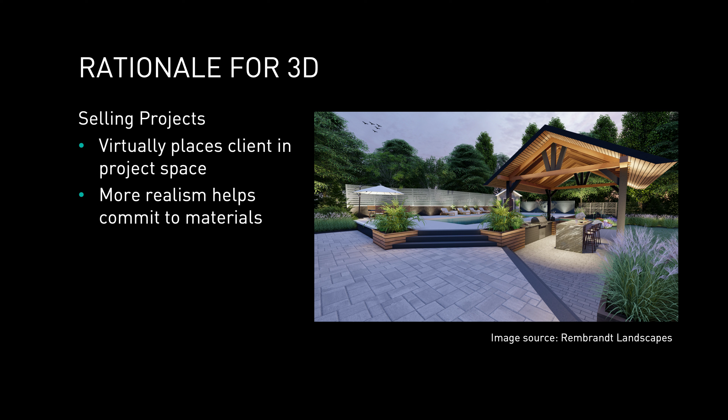So quickly considering the rationale for 3D, and why not all 3D modeling is the same. We may all have seen pieces starting in 2D and finished in a real-time rendering solution like Lumion, Enscape, Twinmotion, and D5. This 3D representation is very telling visually, and it does help sell your vision for a site. In this example, with the video animation of people walking as you move through the landscape, it can also give you a great understanding of what the project will look like.

But the challenge we sometimes see with this virtual representation of the 3D model is that you don't necessarily get data out of it. So there's a need to keep what you understand about objects that are generating data, and try to figure out a way to get a little bit of both — the selling standpoint from a virtual representation, but still be able to capture that data. So we still see the need for plans and sections and being able to calculate from objects and those dimensional shapes. This information is still attainable, but we want to recognize that we might not necessarily see this from those more surreal or post-rendering solutions like we just looked at.

One of the things we understand with 3D is that 3D geometry can tell its own story. When we think about area, perimeter, height, and depth, those are pretty standard understandings of what geometry can tell. But what about surface area? What about volume? What about the distance along an edge or the distance from one edge to another? Maybe even that depth and height relationship, that width and thickness relationship, the weight something might potentially carry, the angle or slope that goes along with the surface area, being able to perceive that angle or slope or gradient, and ultimately things like perimeter.

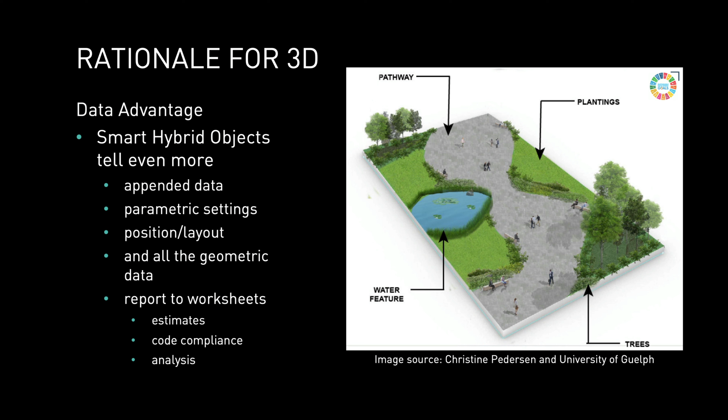So we're going to start into the presentation where we left off with the learning objectives. We're going to go directly into the terrain model. If you have ever heard or never heard of terrain model, one of the things we can all understand is that most sites have a ground surface, and most sites have a changing terrain in their ground surface. So this idea of understanding how we can virtually represent that terrain or surface treatment could be very useful for us in analyzing our landscape.

So a digital terrain model, or DTM as we call it in the industry, is a replication of a site surface. In most cases, you'd recognize it as a triangulated irregular network, or TIN, or it could be a raster or grid network. So you have this ability to see a surface represented in some form of tessellation that stays edge to edge or surface to surface, showing how things relate in that connection of surfaces, and allows you to see what that looks like in the overall context.

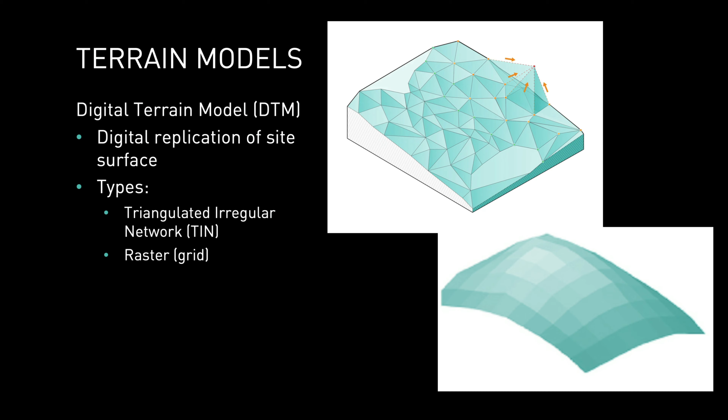So how do we get this information into a terrain model network or some other kind of surface? In most cases, you could get a 3D surface from surveying and mapping techniques, like drones capturing a LiDAR surface, or photogrammetry, where the pixels are smart enough to know their geographic or surface position. You could also get this information from 3D points captured from a GPS device, a total station, or an altimeter, gathering elevation data from the site. And if you're making use of 3D polygons provided by someone or some agency, maybe through GIS or from a survey engineer, all of that source data can be helpful to inform your terrain model.

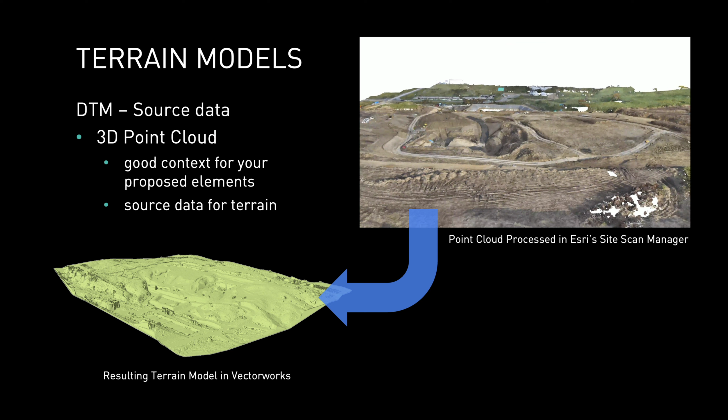Here's an example of how a 3D point cloud could be enabled. Being able to do some sort of scan generates a 3D point cloud, and those 3D points can then be used to create a terrain model. Through an example of Esri Site Scan Manager, you get the site scan and a software application that helps manage those points, and then you bring that information into your software to create that tessellated or triangulated network of surfacing. So those 3D points go to work to create that triangulation of the surface, and in any sense, this is a really good source for terrain creation.

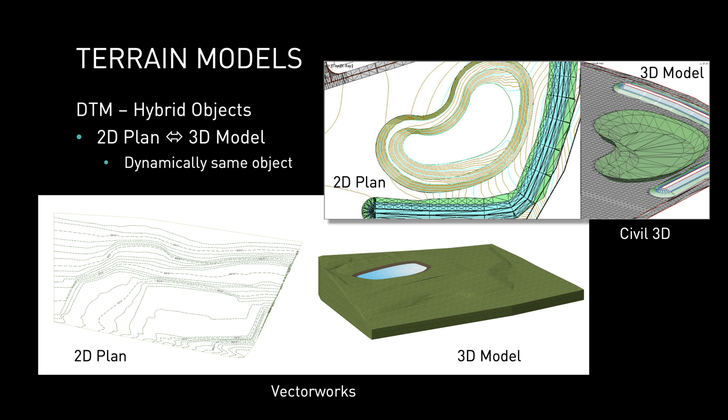Ultimately, if you even just had something as simple as a 2D plan that you could trace into a 3D representation for your model, the benefit is that you don't lose the 2D representation out of it. As you create this into a terrain model, as we see here in both the Civil 3D and Vectorworks examples, you still get a 2D representation of contour work and how the surfaces are looking. This example helps you understand that not only are you creating a 3D surface, but it still gives you that 2D representation. This is one of the reasons a digital terrain model can be very helpful, because of its hybrid representation.

The analysis side comes into play when we look at things like cut and fill, elevation studies going from high to low, slope analysis studies, or even which way surface drainage might be flowing. Ultimately, we like being able to visualize what we're doing with the terrain, and having examples of visibility studies can certainly be useful as well.

One thing they knew was that they were also going to have athletic fields showing up on this site. So they made use of their grading tools using their digital terrain model to understand the regrading needed to get their athletic fields and determine how much soil volume would be created from this excavation. They recognized they had exactly what they needed through the grading technique they used to approach this site.

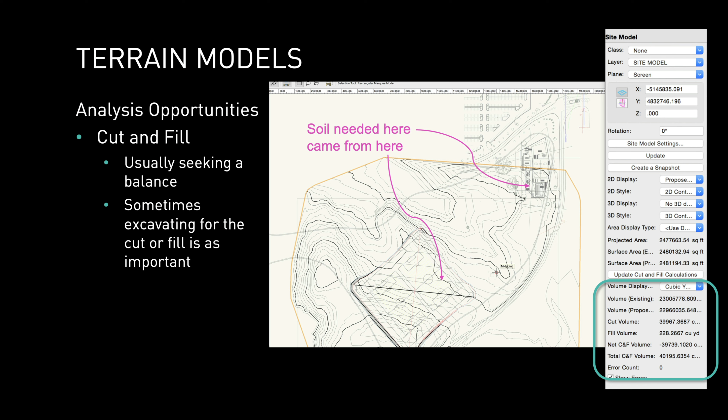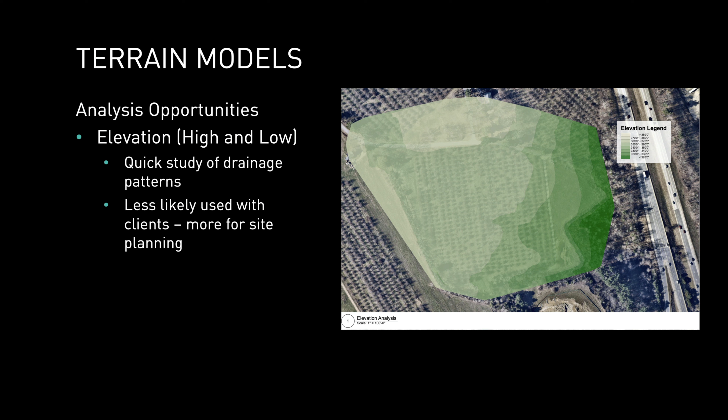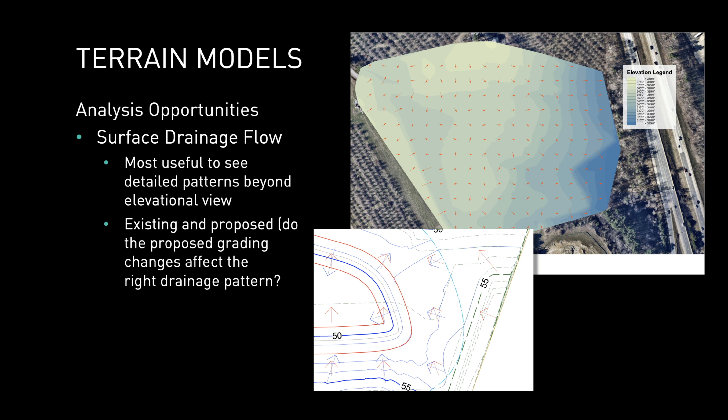And also for accessibility. One of the things we note often is whether or not the site seems accessible for those with differing abilities. One thing you can identify even before starting development is what parts of the site are already accessible, if they happen to have an accessible surface.

Another thing I like to do with terrain models is understand visibility, what the view shed might look like. Using the terrain model to aid in visibility studies is great because you can highlight the terrain surface, make use of 3D views, or try to enhance or screen something with that topography. This allows us to visually recognize through the terrain surface what seems visible at certain elevations, or what someone would see looking from one vantage point to another.

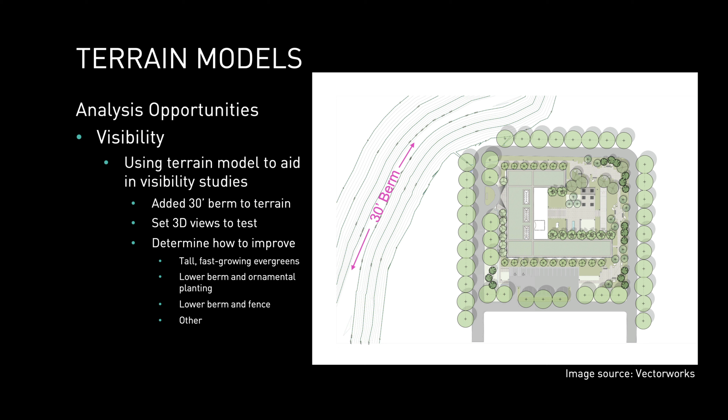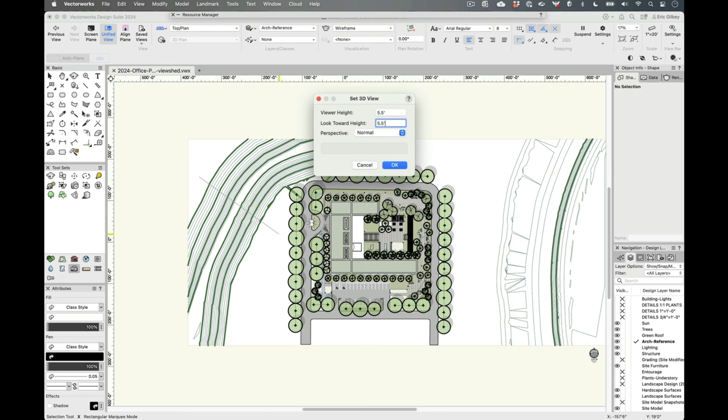So we want to try seeing what the terrain model might actually create when we look at this view. Here's an example of going into the software and creating some form of modeling. We've got our terrain model, and we create a 3D view that goes from one side looking into our site through the model, or through the berm. We identify that our view height might be about 5.5 feet off the ground, looking somewhere else at a normal perspective. Very quickly we see that the only thing we see at this elevation is the berm. So we might want to see, when does it matter what elevation we're at when we can start to see what's going on with the site?

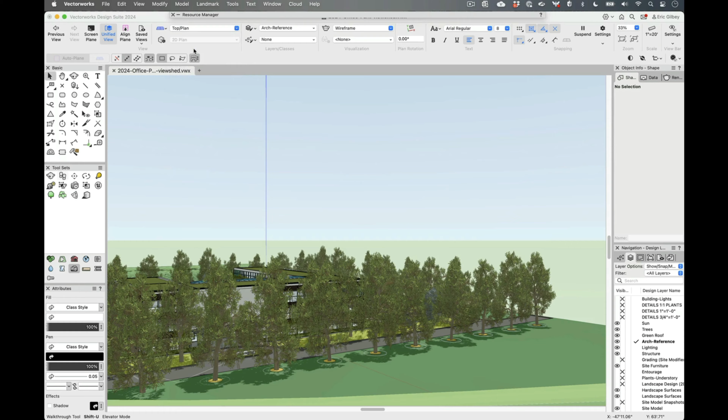You might agree that having a 30-foot berm seems a bit intrusive. It might be overkill and very expensive when we think about putting that much soil in that space. And did we actually get the aesthetic value out of it that we had hoped?

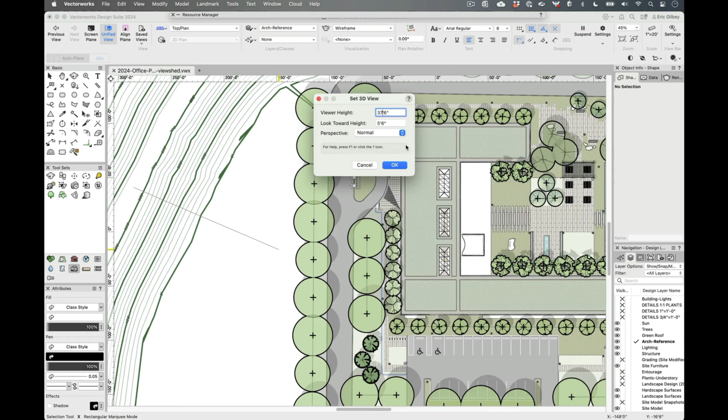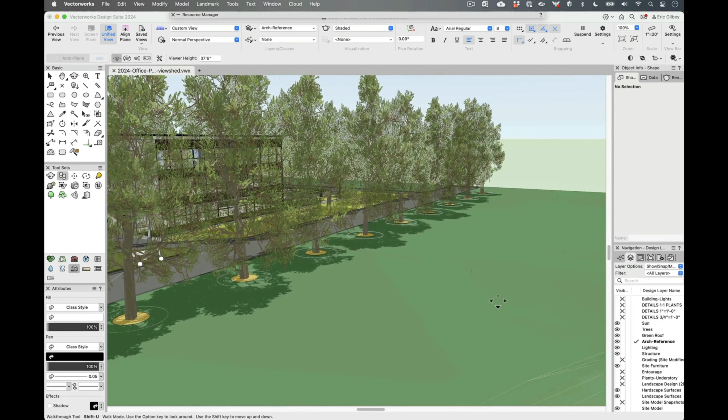Putting ourselves at the top of that berm might cause someone to wonder, if we're at the top of the slope looking into the site, what would we see from this point? It gives us the ability to do a walkthrough and understand what that berm at that massive height would entail. So in most cases, someone might come back and say this doesn't seem to be the way we want to approach this site. It seems too intrusive on our project.

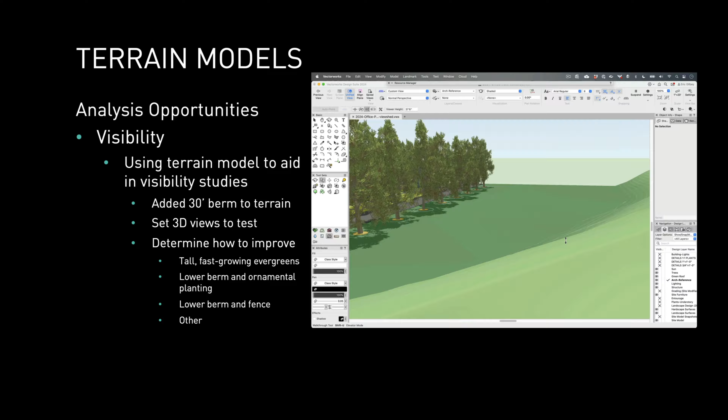So maybe we'll look at another example where we could do this more efficiently. We do another example here where we're working with a 10-foot berm and some plantings on top. Using the same conventions, we set up our 3D view, looking from one side of the berm to the other, and this time we only need to be 11 feet off the ground on the furthest side. We start to see, oh, we see the berm, we see the plantings.

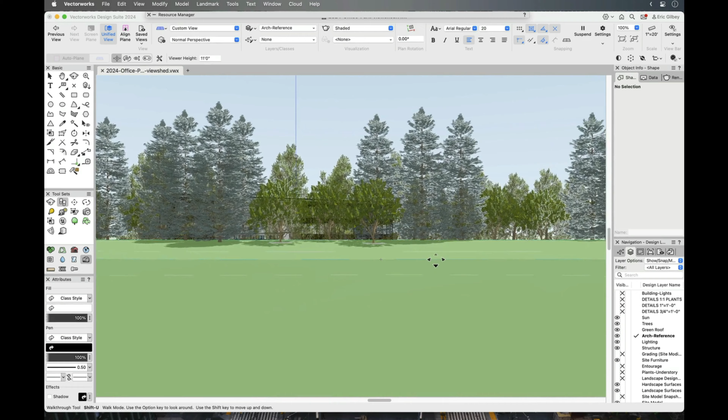We don't necessarily see so much about the project on the other side, which is great because it's managing our screen very well. And if we came in to be somewhat on top of that mound, or a little bit edging on the mound, we could see - oh, we definitely see things once we've come to the other side, and the berm doesn't seem to be all that oppressive.

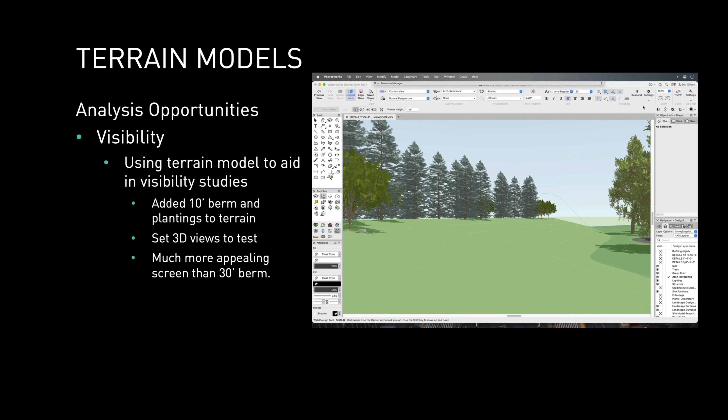So we have this ability to see a 10-foot mound with plantings on top as potentially a better solution, and it allows us to see that this is probably more cost efficient as well, if we had to total up the cost of the plants in a 10-foot berm versus the 30-foot berm with no plants.

So moving along from the terrain, we're going to go into sun and shade studies. This is probably one of the more obvious opportunities that we have to look at what 3D can do where analysis is concerned, because without 3D you can't really do the sun and shade study. But it is one of the bigger reasons why we would want to.

Because in most cases, a client is going to want either sun or shade, depending on the situation of how a site's going to be used. And so making use of this is very important.

So there are several tools out there that can capture this. For solar studies with software, the examples I'm going to share with you are Enscape - this happens to be what they call sun settings. In Lumion, it's called Sun Effect. In Rhino, it's called the Sun Tool. In SketchUp, it's called the Sun Path. Twinmotion calls it Daytime, and in Vectorworks, we call it the Heliodon. There are other plugins that do this as well, enabling you to see sun positioning throughout the day or throughout the year.

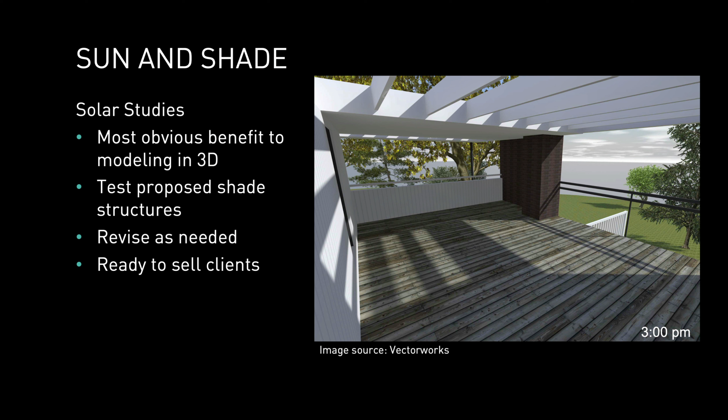Once you have it set, you can show this to clients with a lot more confidence, being able to represent how that 3D structure you've created can actually provide the relief or exposure they were expecting. Here's an example where a firm like McGregor Coxall did this in an urban space.

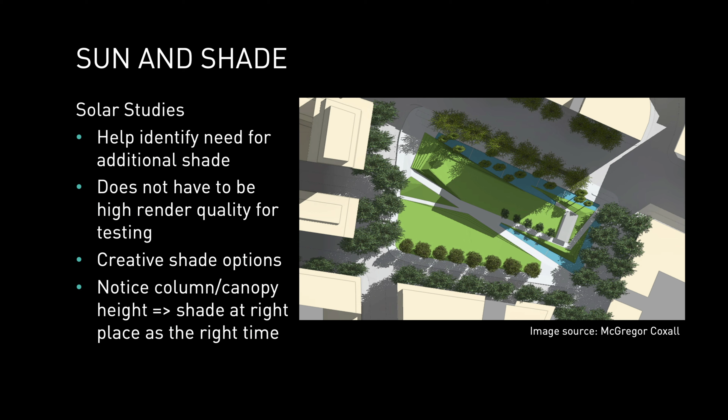They were looking for a space on the site that didn't already have some form of shade throughout the day, so they used their 3D model of the urban context as well as their park to design something very contemporary.

Notice the shade and sun are given some artistic treatment in their project. Not only does the shade canopy itself have contemporary artistic treatments, but so does the sun and shadow. The shadow effects remind us of a dappled tree canopy shade, but also give a very contemporary artistic look, giving a unique treatment to the site.

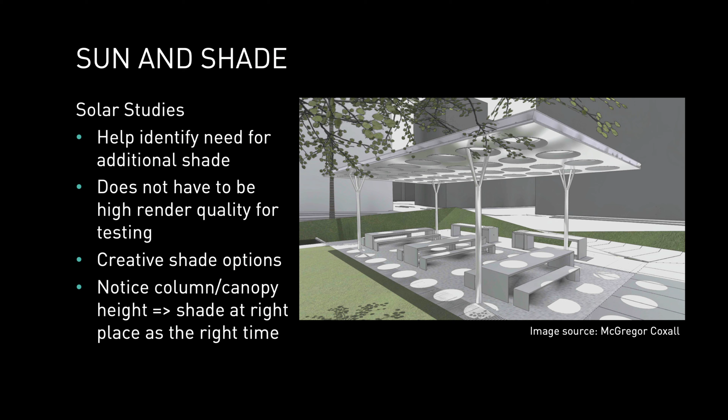They were making use of the Heliodon in their software to do this in a very cognitive and artistic way, so that not only are they achieving the shade they were expecting, but the artistic treatment is verified as well.

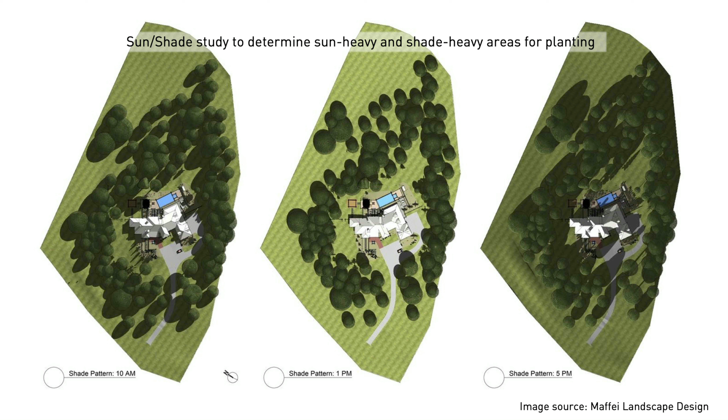Here's an example where sun and shade studies can determine sun-heavy and shade-heavy areas for planting. This was done by a designer named Danilo Maffei, and in his practice, he likes to put in studies for different times of day, and may incorporate multiple suns in one file. Here he's incorporated three different sun objects.

This sun object shows them throughout the day where that shade footprint, or shade print, would be, so he can understand which plants would be better suited based on the shade that buildings or existing trees might give, so that he doesn't have to be out there throughout the whole year.

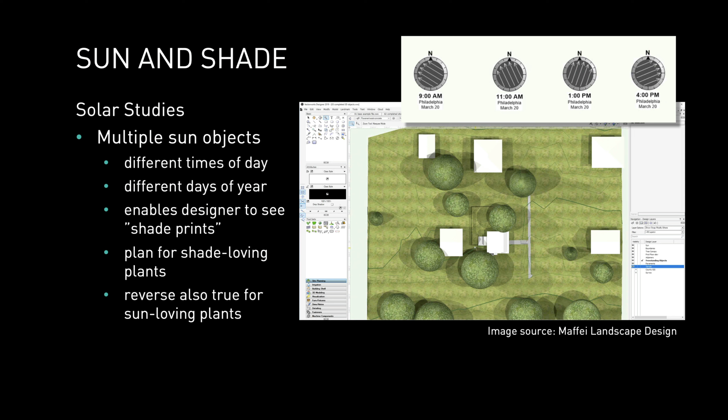He can use his model to study this and understand what parts of the year and what parts of the day provide the most shade and most sun for the site, to do proper planting design.

This helps to reduce the urban heat island effect. Ultimately it still allows them to see whether or not they need other shade structures or interventions to further protect the building.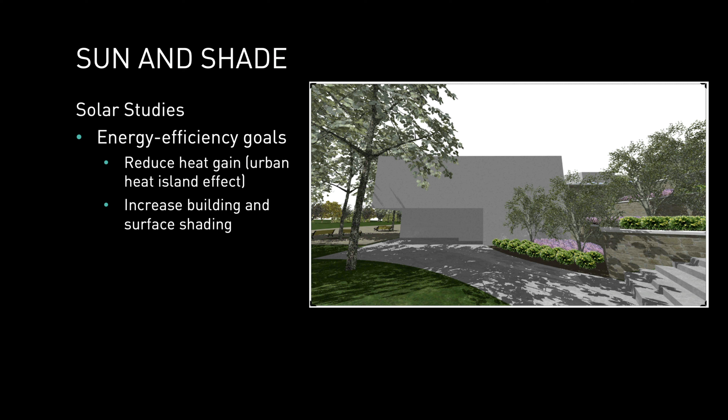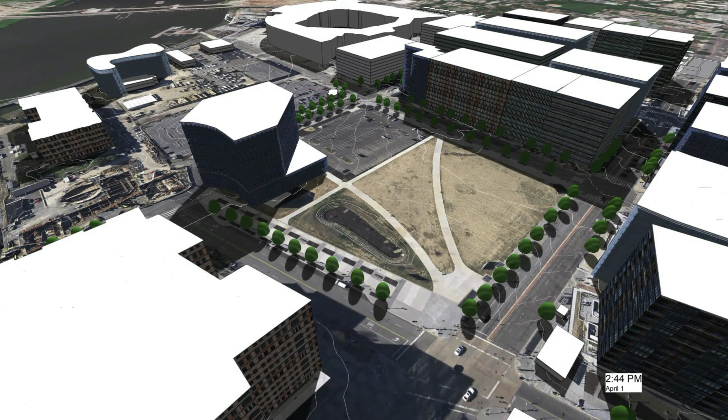These solar studies can be very useful. You see examples here on urban projects and 3D perspectives, but also the ability to recognize smaller courtyard spaces, or even that hillside we were just talking about.

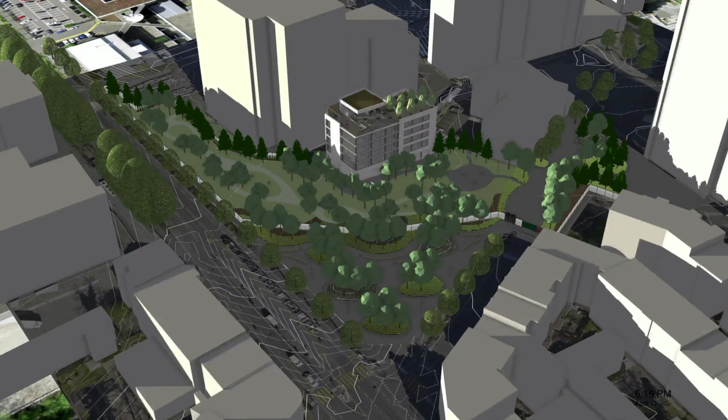What kind of avenues we have in a city park or public space, even on rooftops, being able to understand what sun and shade studies would look like on top of these buildings. We have several different ways we could envision what this solar animation or sun study would be able to do.

This happens from sun up to sundown, from the beginning of the year to the end of the year, and it provides not only analysis but a visualization to help study and also convince our customers that we're implementing the right solution for their project.

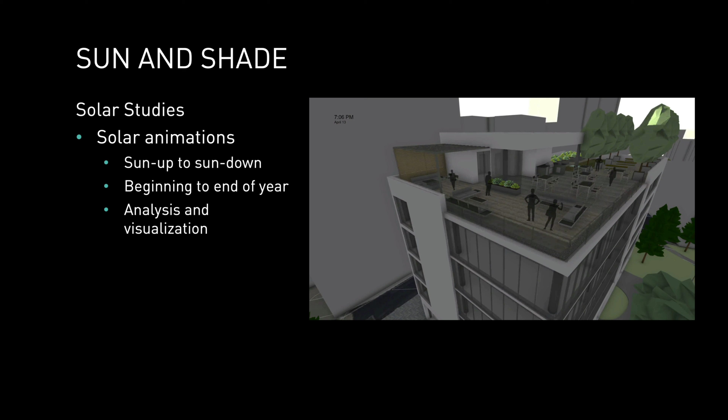This ability to add 3D workflows is important. A lot of people will say adding 3D to our projects doesn't seem sensible because the client isn't paying for it, it takes extra time, and these kinds of scenarios.

I'm just not familiar or comfortable with 3D, I'm more familiar with 2D workflows. But this ability to add 3D really isn't as arduous as you might expect. Let's see some examples of what this might look like.

Generally, the idea is creating a shape and doing something we jokingly call pushing or pulling. It's the same idea no matter what 3D modeling software you're using—it's push-pull in SketchUp, Vectorworks, Rhino, and press-pull in AutoCAD. As you think about 3D workflows, you start with a 2D shape, which is already the start of our workflow anyway. As you do other project workflows, it's a matter of starting with the same geometry but taking a couple more steps like pushing or pulling into conforming that shape.

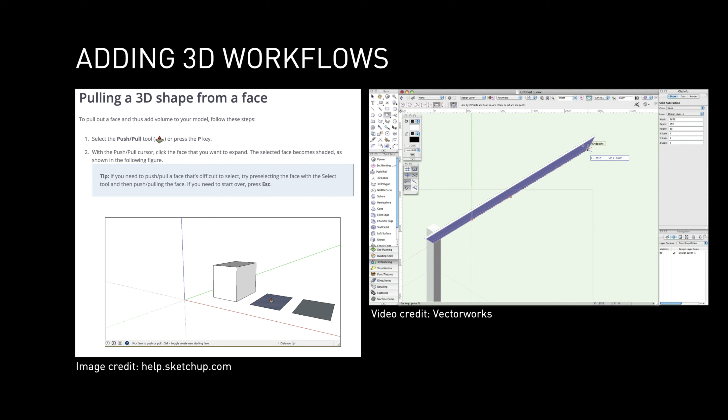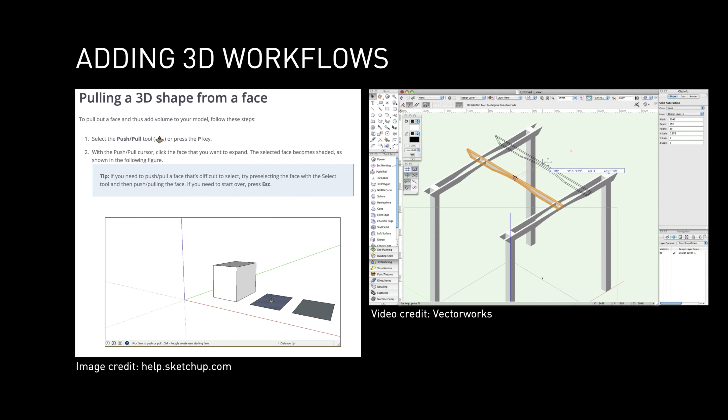Here's an example where one of my colleagues created a quick tutorial on using the 3D geometry tools in Vectorworks, allowing you to create 2D geometry, extrude it—our push-pull method—and let that become 3D geometry that gets repeated. We see a quick recognition of how to make that 3D geometry into something very telling, like this simple sun arbor.

Similarly, my colleague Peter Summerlin created a tutorial you might find on YouTube showing how you can start with 2D geometry from AutoCAD, bring it into SketchUp, and see this recognition of 2D implementation into 3D visualization treatment. Even though this doesn't go extremely far into the whole design process, it's a process of understanding what 2D geometry creates faces, and what those faces can do when you turn that into something visualized in 3D.

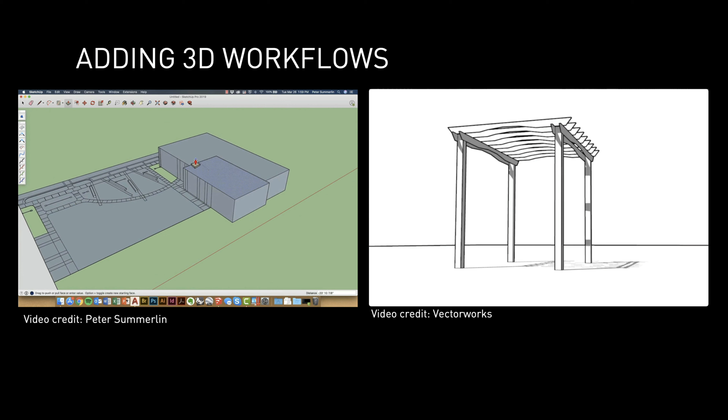Being able to do representation in 3D gives you tolerances for those face treatments—which ones seem closed, which seem open—and once you see them, it allows you to grab some of those faces and start your 3D push-pull methods so you can quickly visualize what these buildings or landscape elements would look like. This ability of generating 3D from those 2D drawings is already there—it's just a matter of grabbing that information and visualizing it.

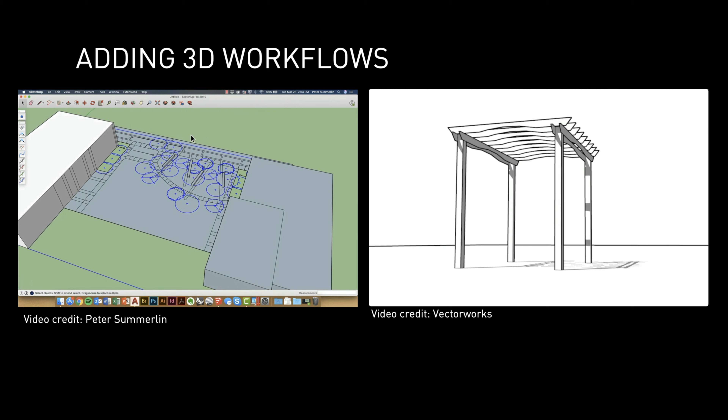The next step is to talk about what other 3D elements are going to be visualized. In this example, the next step would be bringing in the plants, and what those would look like. So this idea of taking 2D geometry and turning it into something easily visualized is the scheme I was trying to go for.

One thing we understand is that oftentimes you might decide to start 3D once you're committed to that 2D plan. But in some cases, if you're working with a hybrid workflow, that isn't necessary. You can create the 2D element, make it 3D, and start to understand what you're developing without spending much more time creating that 3D element out of the 2D one. That means as you continue making changes, you don't have to wait for the plan to be almost finished to start visualizing—you could start visualizing from the very beginning.

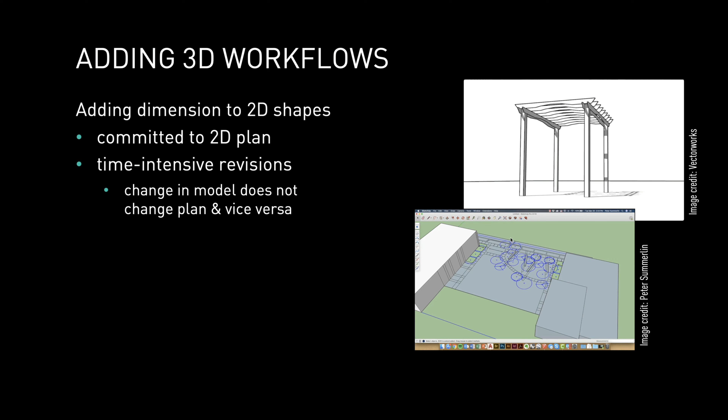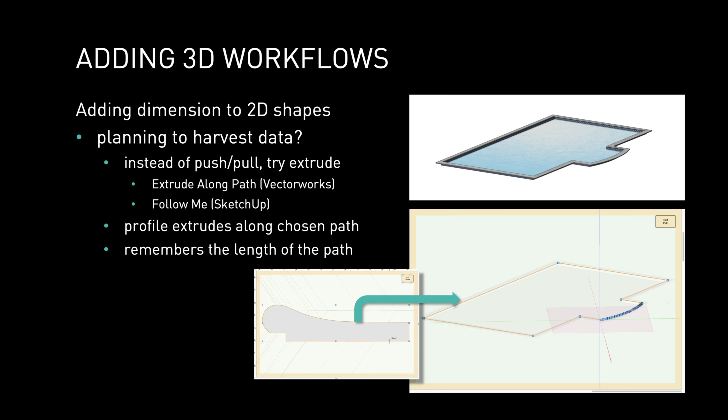This idea of pushing and pulling can continue into something we refer to as extruding. Instead of pushing and pulling, you might try extruding along a path, or 'follow me.' Depending on the tool of choice, you might have different conventions where it takes the 2D profile you've created and a 2D path, allowing you to take both elements and turn them into something 3D and visualized, as we see above. Here's an example where a pool edge with a pool coping starts to visualize, and you see quickly—because you already had those 2D elements—how fast that can become visualized into what that pool coping would look like.

The benefit of this is that that geometry remembers the length. It remembers its information. So if you're making use of software that allows you to keep that information, that's going to be a bonus, because as I get ready to report how much coping I need, that extruding along a path will allow me to understand how much of that coping I really need to get put into the pricing, or how much material needs to get ordered for that project.

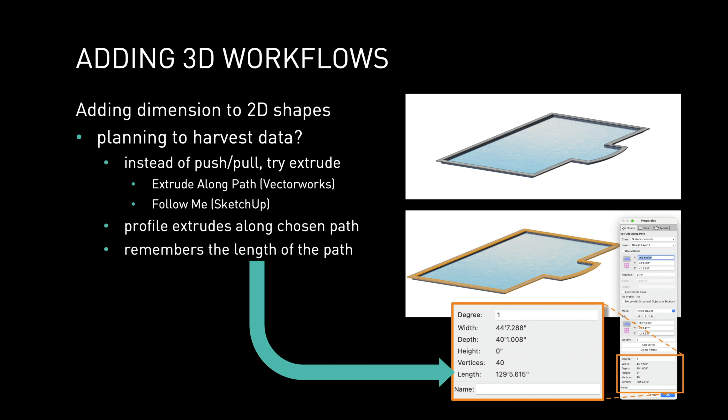Another example is parametric modeling. So we saw the push-pull, we saw the extruding. Now there's this idea of modeling in similar scopes. We still see this idea of taking a 2D geometric shape, but doing something with it that is a little bit more scripted, or a little bit more settings oriented.

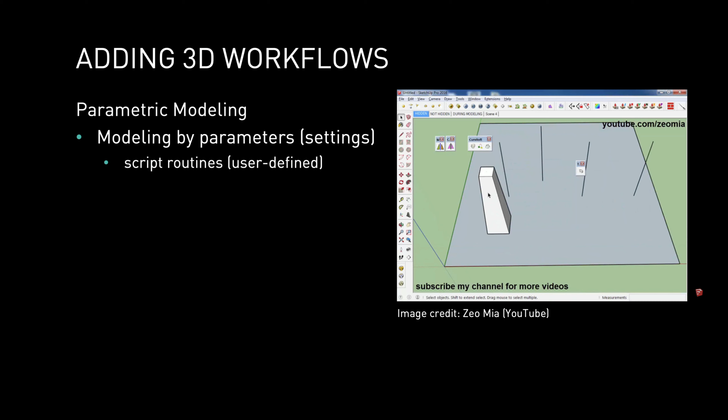So we see this idea of user-defined things. Here's an example where you might create an object, in this case a tapered extrude, and that object could have parameters like height and the angle that gets that element formed to a smaller shape at the top. Whatever those dynamics are, it allows you to see what those settings can do. So it's a little bit different than pushing and pulling, but it's taking push and pull and setting it up as a script or a setting.

Here's an example where we create a tapered extrude where you've got the Z or the elevation height of this object and see that transformed based off those parameters, and very quickly that object has more information, so it knows how tall it is and it knows what that angle is on it. So if you need to get some of that information reported, the object knows it.

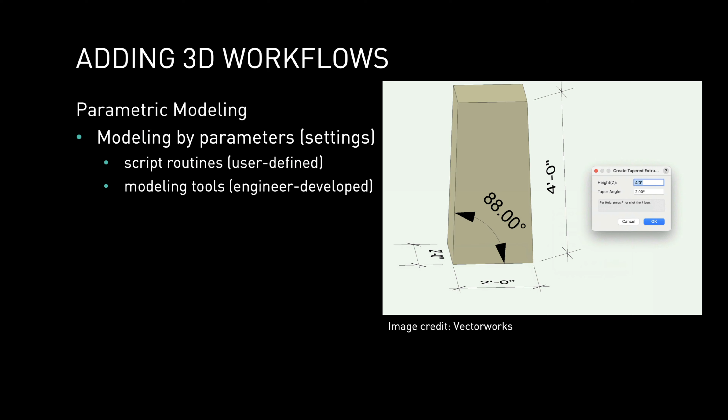Now it gets even more interesting when you get something that's a little bit more parametrically controlled. Notice in this case, this is an example that Vectorworks has, so it's beyond just the idea of a tapered shape. Now this tapered shape is going to have other elements. It's going to have a height, it's going to have the shaft, it's going to have a capital or some sort of a cap, and it's going to have a base. So that information is something that we would have wanted to have known anyways.

So how much material would we get out of this object if it was even more parametrically controlled? In this case, it happens to be a column. So if you're creating something like this, imagine that it might take you a little bit more time to create some of these settings and the parameters to make it.

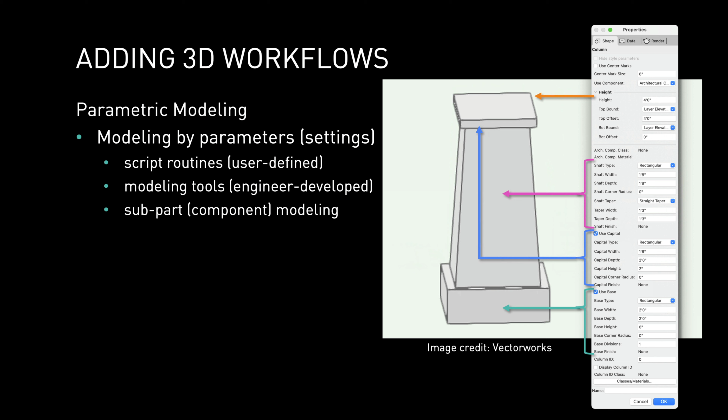But once you have these objects, they're easier to change afterwards. So if you selected this and made changes to the height, the width, the base or the cap material, those parameters mean that those changes are more immediately made. So the con is that yes, you have a little bit more time setting up than just a push-pull and those kind of 3D treatments. But the pro is that you now have that information out of that object that can report on itself, and revisions are made so much easier.

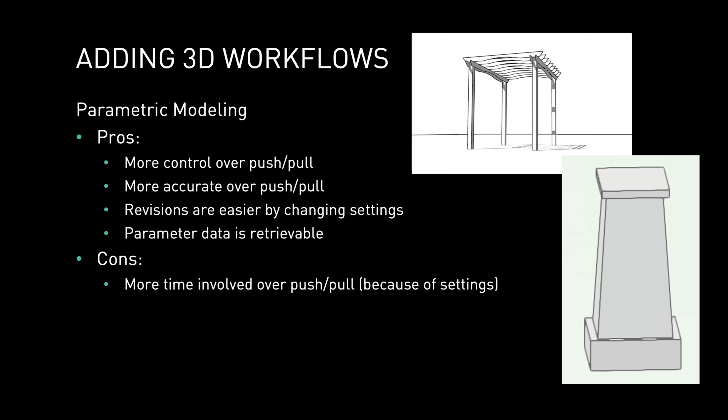And we know that a lot of the work we're doing has revisions involved, so why fight it? You understand that being able to get back into that object's parameters and making just a couple adjustments and seeing what those results are means that your changes are made so much faster.

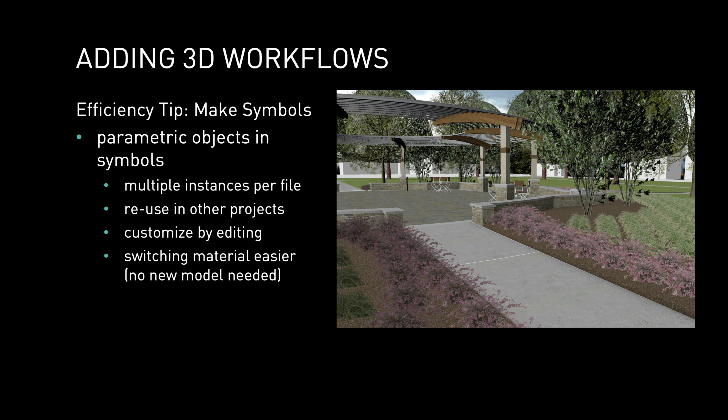Okay, so another efficiency is made in the symbols. Parametric objects are made into symbols. This ability to see that same idea where those parametric objects can be repeated - we see an example here where this post and rafter in this pergola is very unique, very custom created. 3D modeling is at its height here. There isn't anything other than the parameters making this that is making it any more intelligent.

But by doing that, we now have created this object inside of a symbol. And that means that if we wanted to change that symbol from, let's say, one type of material to another, that's made more easily. So once we make it there, then the rest of them are made.

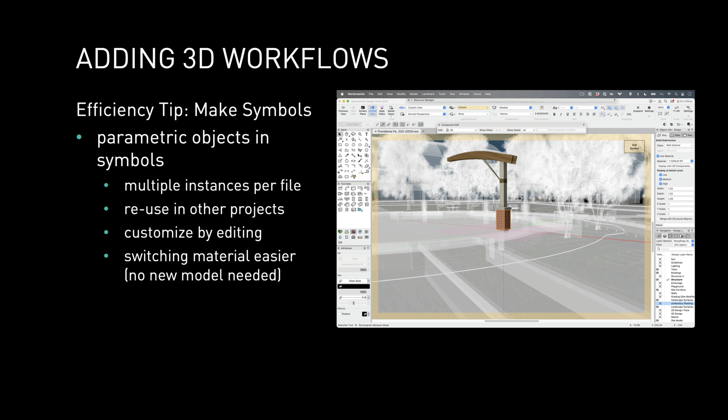Okay, so we're going to get into this section talking about harvesting your 3D data. Being able to get that information back out of those objects, whether they're smart or just plain geometry, we have this ability to get that data back out of it.

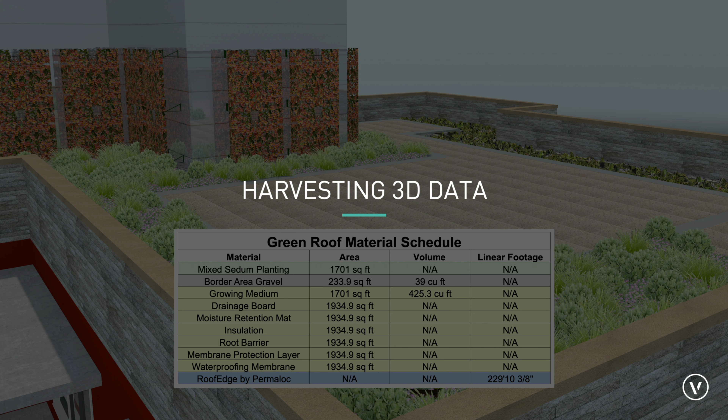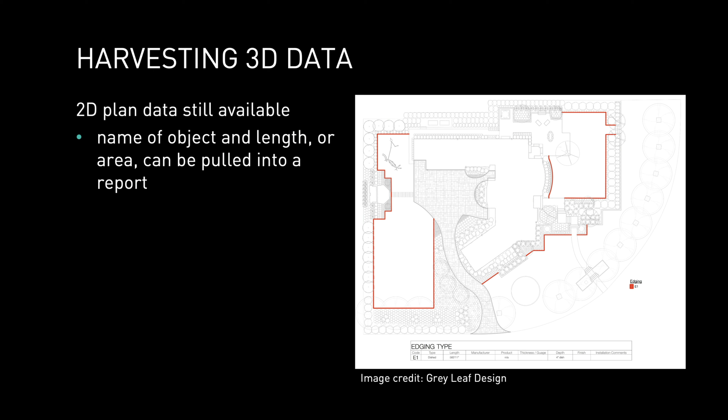So when we start down this road, understanding that 2D plan data is still available is really important, because you might not necessarily model every single thing in your file, but you might. So if you did, that 2D geometry is still there. Even though you might have modeled your edging like we see here, that 2D data of its perimeter or its overall length is still capturable. You can still get that information - you did not lose it just because you might have turned it into a 3D object. But we also notice that the ability to see 3D data gives us more information.

So if we're creating a green roof in this case, or an elevated paver system, we now have information from all of those objects that help us get more information about the overall green roof. You can capture area, length, volume, and weight, because these objects have components or other 3D geometry that's part of that object. So if it's a landscape area, hardscape, or some other componentized object, we can capture its area, as we see here in the chart. We can capture volume if it has information associated to volume, like gravel or growing medium. But in all senses, we can get linear feet if that's the only thing we need out of this object.

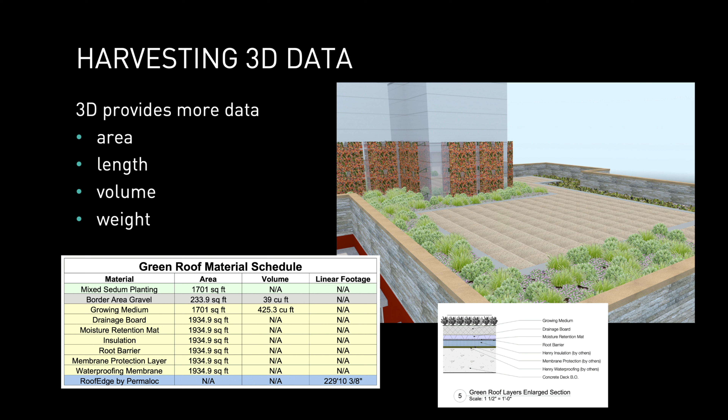The next benefit is that you have the ability to capture your details much quicker. So you have the ability not only to see it visually and get understanding through your reports, but you can take a slice through it and see your details happen so much faster than if you had to redraw them on your own.

Okay, now we're talking about harvesting water. Harvesting data is important here as well. 3D allows us to get surface area of the rooftops or other capturing devices, and that allows us to get slope. We also have the understanding of what runoff would be generated if we had slope on other surfaces. That allows us to generate how much volume we're going to need when we capture that water or other elements—in most cases, I'd expect it's water.

So when we figure out how much volume of harvested water we have, do we have some sort of catchment device or vessel large enough to hold the water we expect to capture? That 3D data allows us not only to understand the capturing side of things, but also the storage side, so we can verify if our storage devices equate to what we expect to capture.

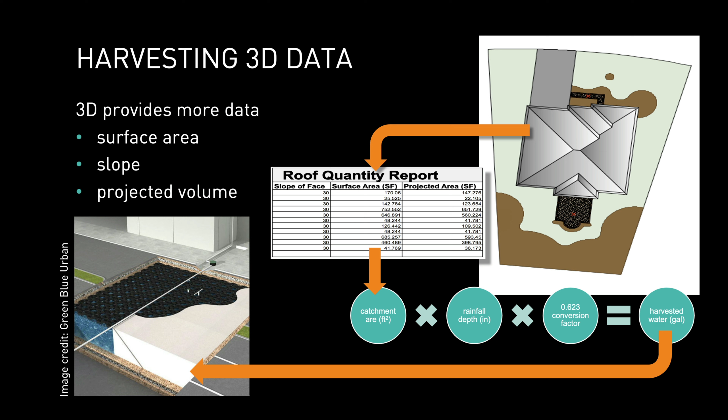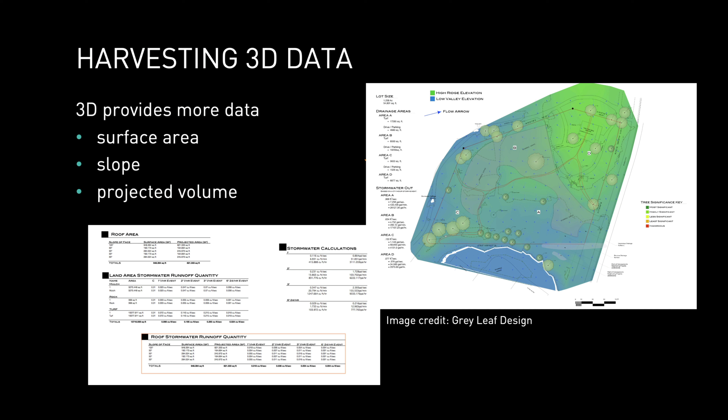Another example here uses other elements—a digital terrain model in conjunction with a landscape area, in conjunction with worksheets that allow us to run the complicated computations for stormwater runoff, and understand the runoff coefficients for certain areas on our site, which also get different classifications based on their slopes. We had the ability to use all three of these objects to help calculate a stormwater management plan, as we saw here from Grey Leaf Design.

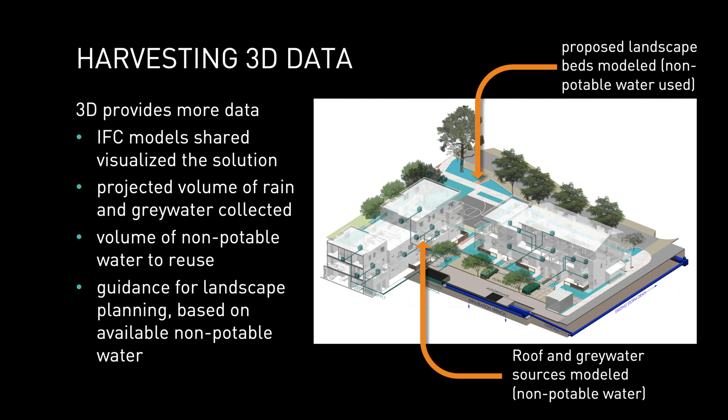Another example we see from PCLD, or Pacific Coast Land Design—they made use of 3D to help them with IFC models. As they were doing BIM collaboration with architects, stormwater, and civil engineers, they were able to understand how much gray water they could capture besides the typical rainwater coming to the site. They made use of the 3D geometry from the IFC files and their 3D model to understand how much water was going to be captured, how much landscape needed to be supported, and whether they had enough water being captured to support that. This also allowed them to visualize what things would look like once they'd captured this. So at that point, 3D isn't just visualizing things—it also helps you use the 3D geometry to do a lot of this data calculation, which then helps you tell the story, win the project, and understand whether or not you're achieving sustainable goals. All of this can happen because we use this 3D data to help analyze.